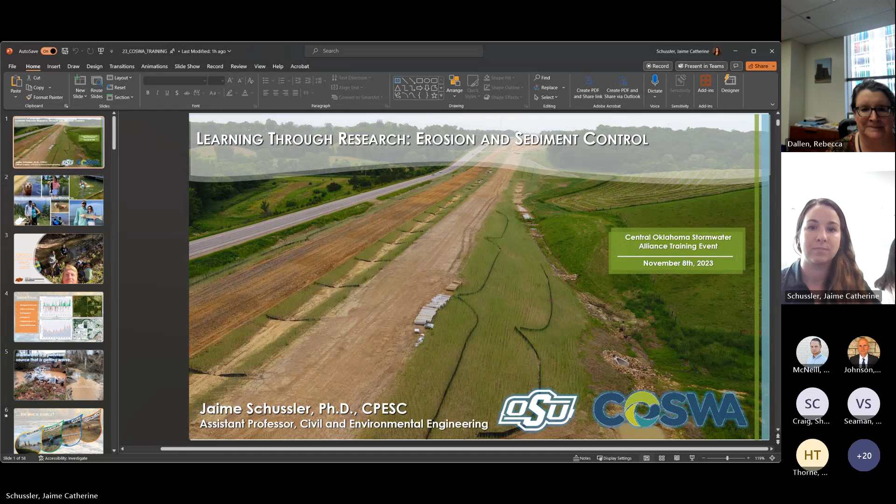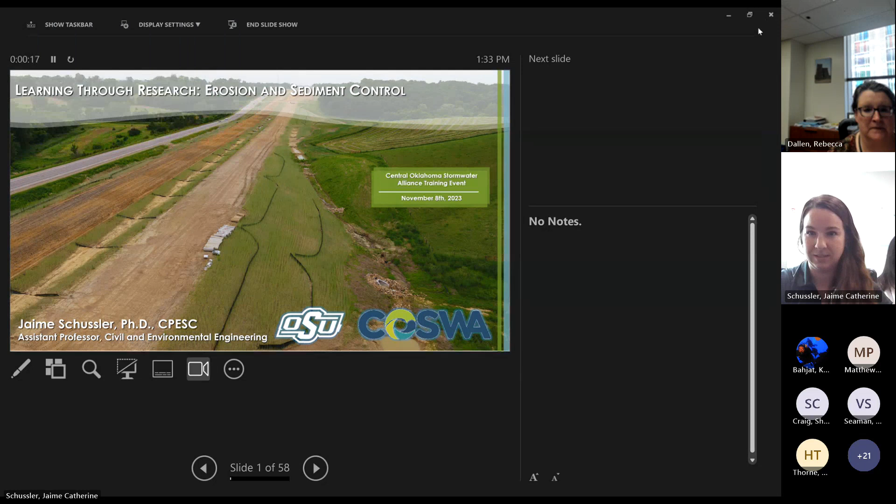Rebecca, are you able to see our screen? Yes, it just seems small and I'm not sure why, but we can see it. Okay, give me just a second. I apologize. Of course. Is this better? It is much bigger, yes. We can see all the... ooh, it ran away. We're almost there. This is the problem when we're plugged into docking stations. Yeah, I understand. Okay, but now I'm afraid we're on presenter mode. Is that right? Yes. Are we good now? That's the ticket. Third time's the magic button, I apologize for that. You would think with virtual learning we've got it figured out, but I appreciate you sticking with me through that. And thank you so much for having us. We're really excited to be here.

And this is a really special opportunity for me to get to have Cheyenne co-present with me. So this is really exciting to be able to showcase one of my graduate students' very hard work too. So as Rebecca said, we are going to be talking about the research I've done in the erosion and sediment control space and some of the more implementable tools that have come out of this. And then Cheyenne's going to present a bit about her research that introduces a new idea within erosion and sediment control that has to do with sustainable design.

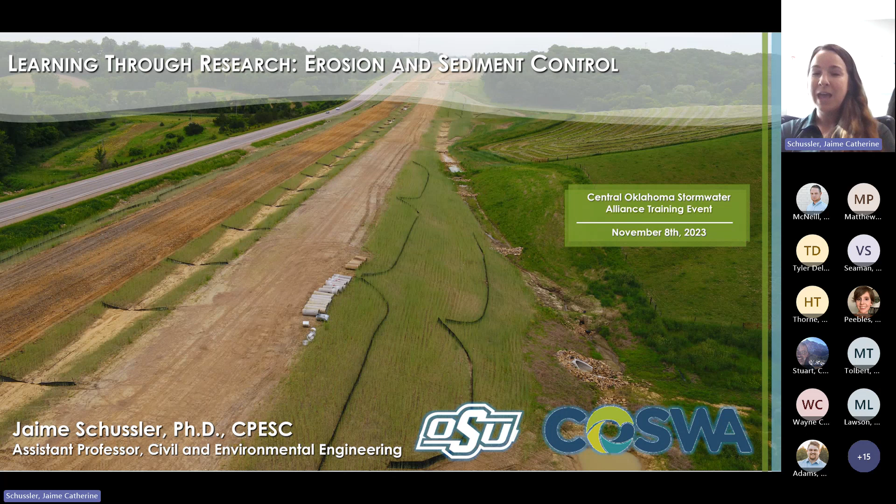So I always like to start out, if you've seen me present, by sharing some pictures or my story around our water resources. That's because it's really important to me in my personal life as well. So it's really exciting that I get to do work in my professional life that also complements my interest here. I care about our water resources for a number of reasons. One, you see this golden retriever, his name is Max, and we cannot keep this guy out of the water. He is our one and only baby right now, and we just want to make sure whatever water he's getting into, because we can't keep him out, is nice and healthy.

Also, we love to fish. You can see these are some of my proudest catches. But also, I grew up in the Lower Guyandotte watershed in Milton, West Virginia, and we struggled a lot with water quality and water insecurity. This has really inspired me to pursue my education, and now also research and mentoring in the stormwater space. Since 2022, I've been with the School of Civil and Environmental Engineering at OSU.

And I appreciate the Go Pokes because we were contemplating what picture to put here. We did think about putting that goalpost in Theta Pond, but we figured everybody has seen that. So instead, these are the lovely faces that make the Stormwater Research Group work here.

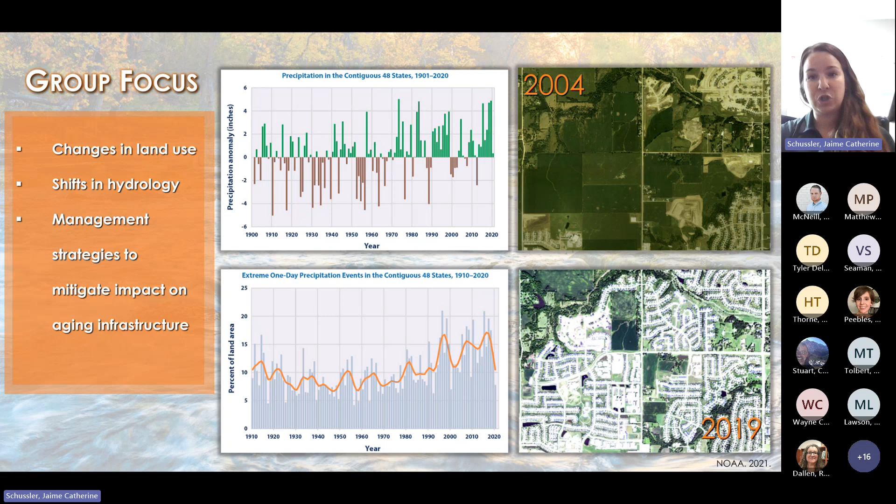Our group focuses on a number of different things, but primarily looking at changes in land use. So we look at stormwater post-construction, once we've got our neighborhoods built out, but also during construction. And that's where we're going to focus today, on that erosion and sediment control piece. This is all really important because we're having a lot of shifts in hydrology, with a lot more rainfall happening very intensely. So we really try to find management strategies to help mitigate the impacts of this changing hydrology on our landscapes. Stormwater is the name of our game.

Maybe that's because of the way we're implementing erosion and sediment control. Maybe they're just not adequate enough. But whatever it is, we've got to find solutions to get better at it. And so that's what we really focus on.

So I keep talking about stormwater, but it's not just construction sites. We know that stormwater from industrial, agricultural, and urban sites are very difficult and present their own unique challenges. But today we're really going to be focusing on that construction piece because that's where we're seeing those really highly turbid flows come from. So that's where we're going to be today.

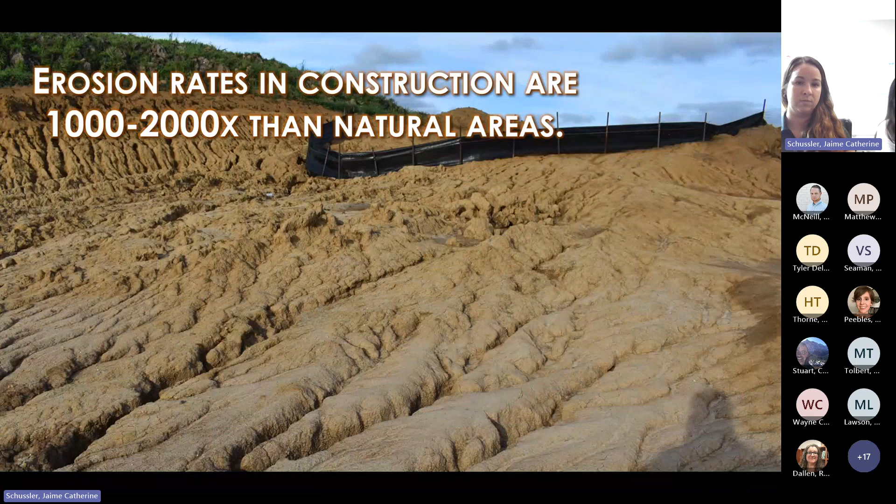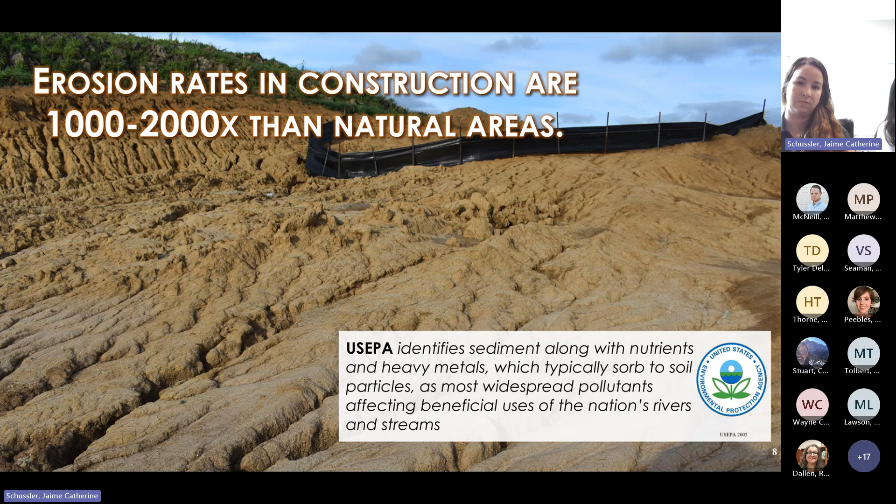And so Cheyenne, can you tell us a little bit about what we know in construction stormwater? Yeah, hi. So erosion rates in construction are anywhere from 1,000 to 2,000 times higher than natural areas. And the US EPA identifies sediment, along with nutrients and heavy metals which typically sorb to soil, as the most widespread pollutants affecting the beneficial use of our nation's rivers and streams.

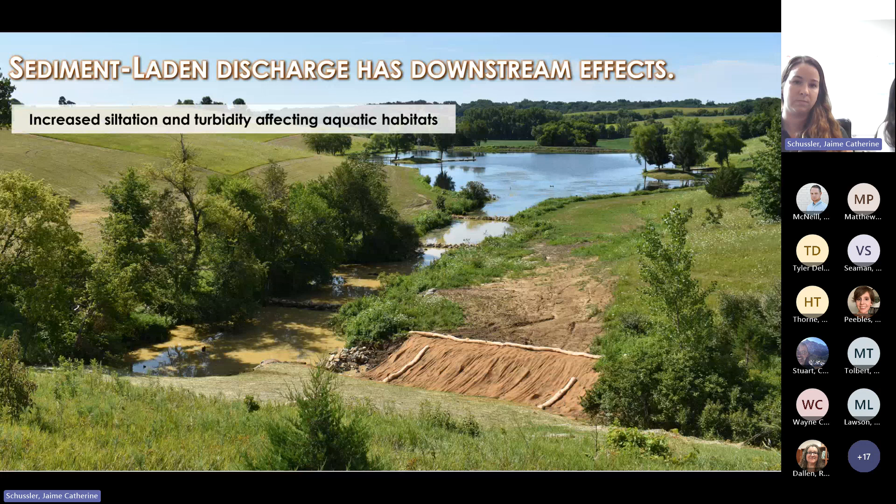So sediment-laden discharge has some downstream effects, and some of them are increased siltation and turbidity, which can affect our aquatic habitats. It can also reduce conveyance capacities, leading to flooding. It has a poor public perception, and it also can increase the water treatment that's needed later on, and we also get a loss of nutrient-rich soil.

The annual cost of soil erosion in the U.S. is estimated to be $45 billion.

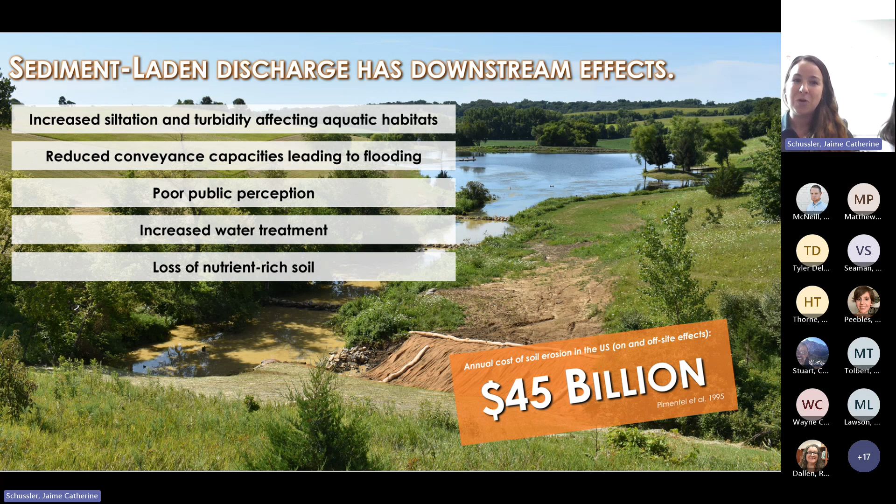So just to provide a little background of the picture that we're showing, this was a private farm owner's pond just downstream of a large construction site that I was working on. This is to provide some context that what we're doing on our site has real implications to people very nearby. And it could be any number of these effects, but especially with that poor public perception - if this was your pond and you were going to have to figure out a dredging plan for it after the construction finished, you would probably be wishing the people upstream were doing a bit better.

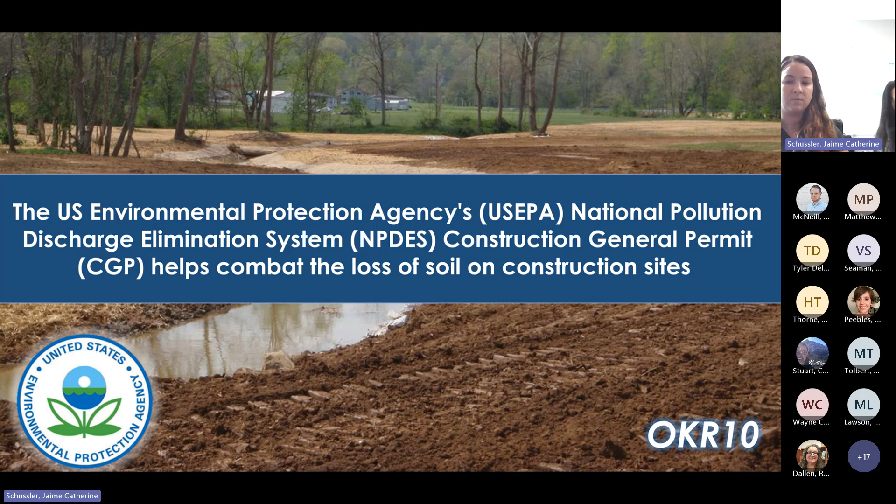So what are we doing about it? The US EPA has their National Pollution Discharge Elimination System, and within that is our construction general permit, which helps combat the loss of soil on construction sites. In Oklahoma, that's our OKR10 permit. Some of the requirements of the construction general permit are you have to submit a notice of intent if you plan to disturb more than 1 acre, and you also have to have a stormwater pollution prevention plan.

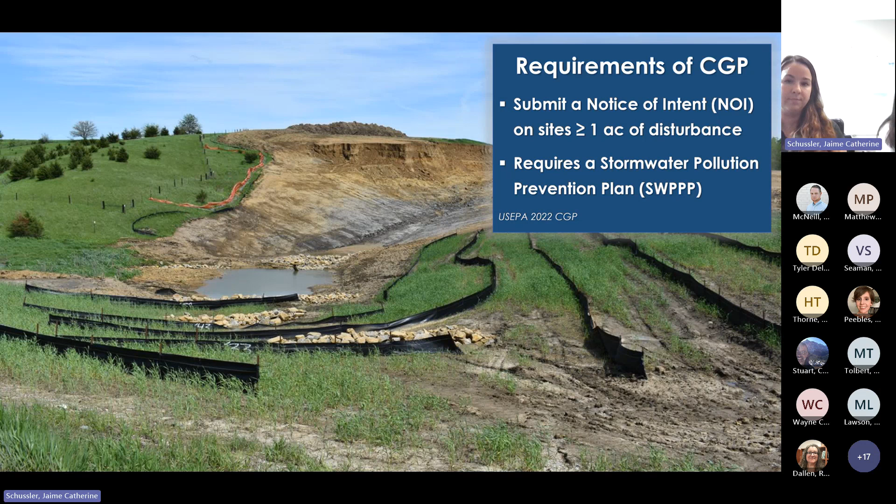So a stormwater pollution prevention plan is a living document that includes the design, installation, and maintenance of erosion and sediment controls. So what are erosion and sediment controls? Well, erosion controls work by absorbing or diverting energy, slowing the velocity, reducing dust, binding soils, or increasing the ability to absorb and infiltrate water. And then we have sediment controls, which work by intercepting flow, creating an impoundment, or providing volume and time for that sediment to settle out.

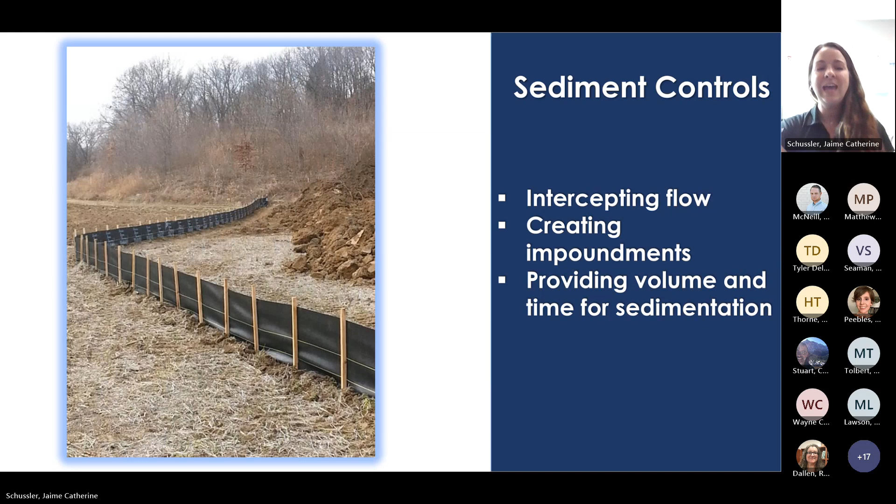And that's great that we have some of these practices in place, and some of them go from state to state.

But there's a lot of design guidance that's quite variable. And so that's one of the things that we try to address with performance-based or scientific-based research, to really say, instead of just, oh, this is a best management practice, trying to put some ground truthing into that with data. We often put in these practices out of rules of thumb, but we lack that true knowledge of how practices perform, and even more so how they perform during actual construction.

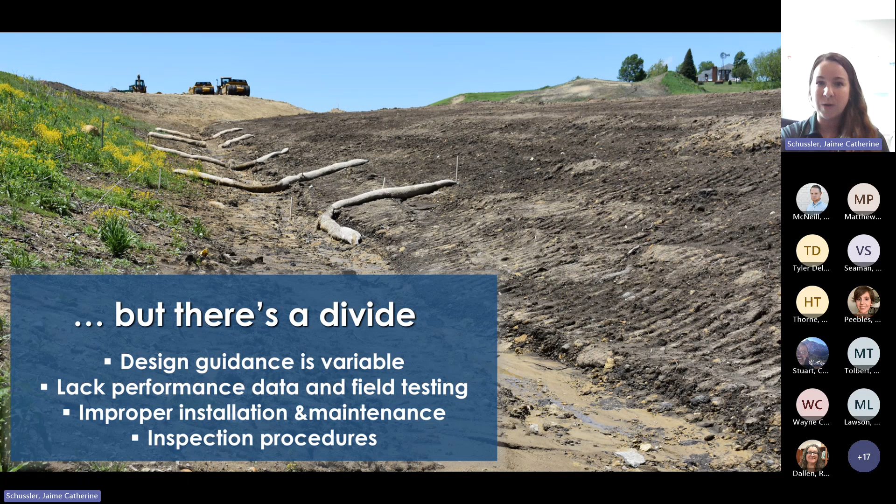The other thing we see is more on improper installation or maintenance. Maybe this is from lacking resources or just lack of knowledge. And so that's one of the things that I'm very passionate about, is that we're trying to spread the good word of what erosion and sediment control is and how these practices should be performing. The other thing is, Jaime mentioned it, a SWPPP is a living document. And so we need to be inspecting and updating our SWPPP. And sometimes we just don't have the power on site to be able to do that, the man or woman power that is. And so there's a huge divide when it comes to the design of these practices.

So we're going to focus largely in the ditch check space or check dam space today. Some that we'll talk about are riprap, silt fence, and wattles, or some people call these socks. And so this is really what we're going to focus in on for the majority of our presentation, with some small deviations. Now, in this last image, we see a lot of newly installed ditch checks or check dams, and they're doing great, or we expect them to do great once that rainfall comes.

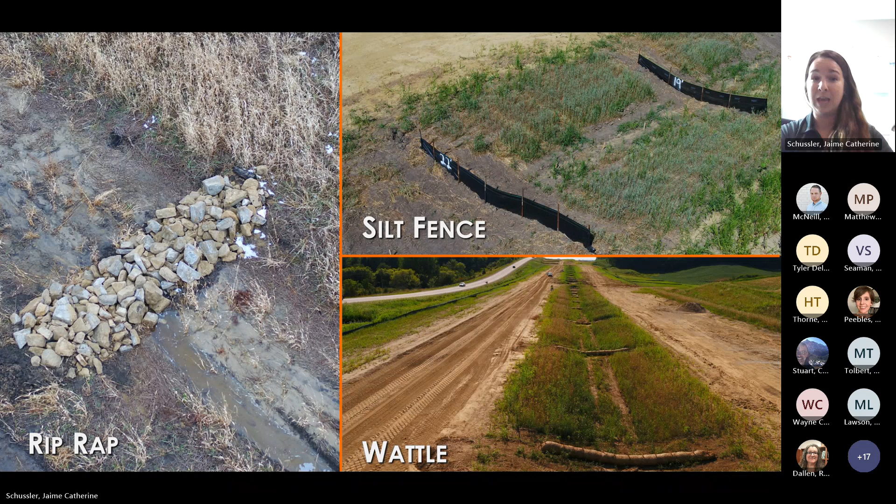Jamie, I don't know if you can hear me, but we have lost your audio. I wanted to look into that. Oh, goodness. Did you have an issue? Your audio for a sec. How long has it been? It was probably about 15 seconds. We were looking at that last ditch check picture. Okay, that's all right. And we don't know how long they've been in that state, I think is kind of where you were at. Right, exactly.

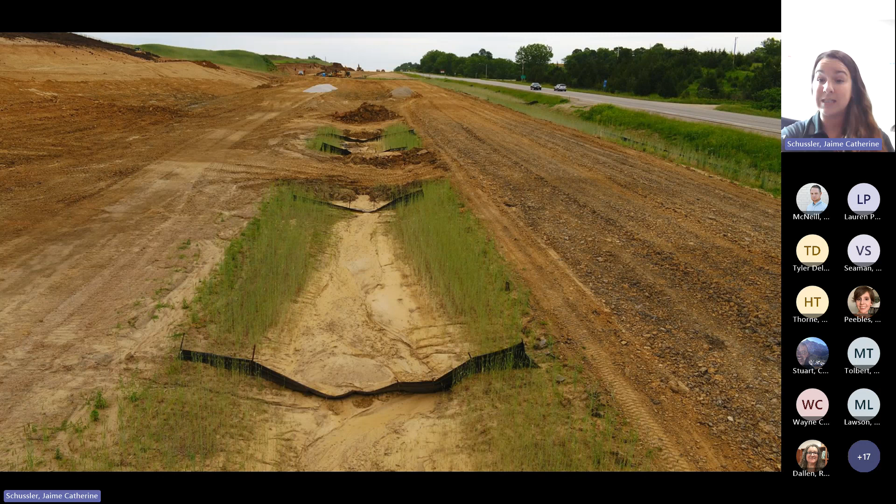Thank you, Rebecca. So of course, we're not sure what caused this, if it's the sediment load, if it's hydrostatic pressure from channelized flows. And so we really wanted to identify what we could do to improve this. So we installed a number of ditch checks in various installations. We did weekly inspections and monitored the rain. And then we also did ground surveys to track the channel erosion and sediment deposition. And this is part of our effort in putting numbers behind the performance of some of these practices.

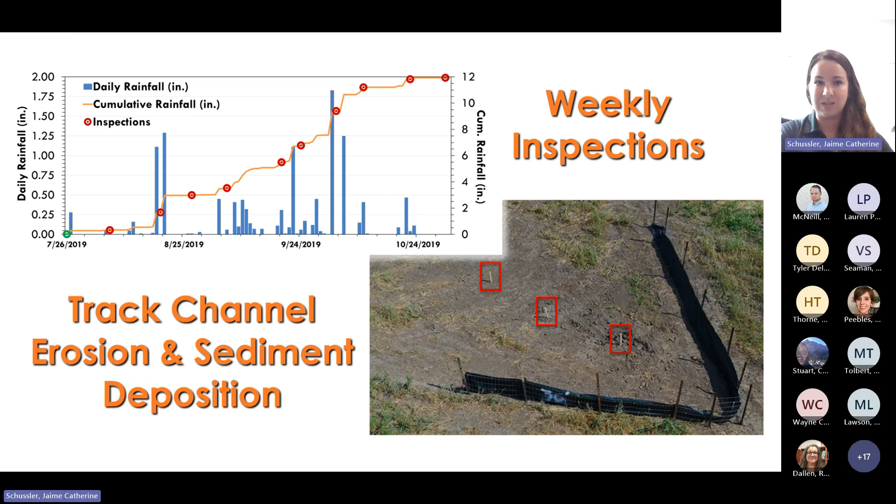So this is our standard silt fence ditch check. I was working on an Iowa DOT site. So this was just a silt fence installed perpendicular to the direction of flow, and just staked, I believe they were 4-foot spacing on this. And so over time, this was after 12 inches of rainfall, we see some sedimentation that's happened upstream in this channel. And then downstream, maybe not so much. We also see this T-post that's deflected and maybe some evidence of undercutting here. And so when we looked at 3 different instances of the same installation, we found on average we were capturing a half of a cubic foot of sediment on one of these silt fence ditch checks. And so we looked to other places.

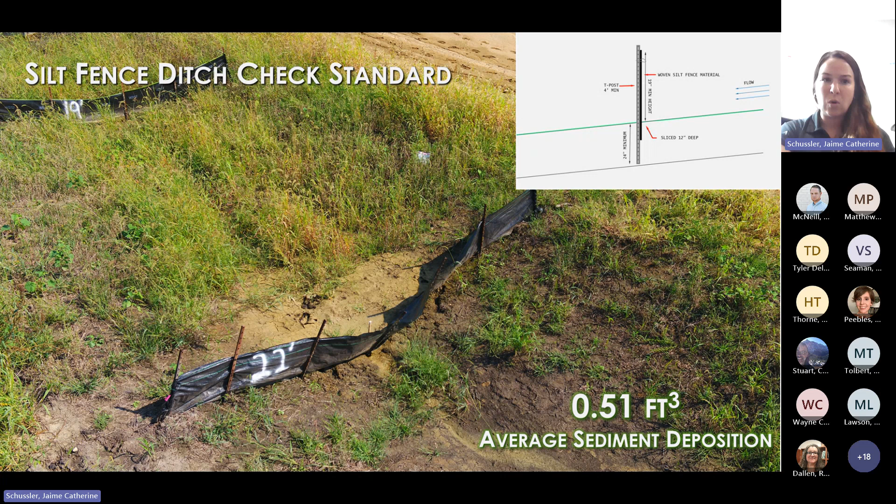As I mentioned earlier, the designs really are variable. And so this was a silt fence ditch check that we saw being used in the southeastern portion of the US. And this was a V-shape silt fence ditch check. It was cut slightly lower at the vertex, and this was to create a weir or a known dewatering point that we could control. And that way we were hoping if we can control the hydrostatic pressure, then maybe we're not going to have that T-post deflection. The same thing you'll see here, we have like a chicken wire or a wire mesh reinforcement. And just visually, we can see that the sediment impoundment goes much further back in the channel. And when we put numbers to that, we found that we increased the sediment captured on one of these ditch checks by about 4 times.

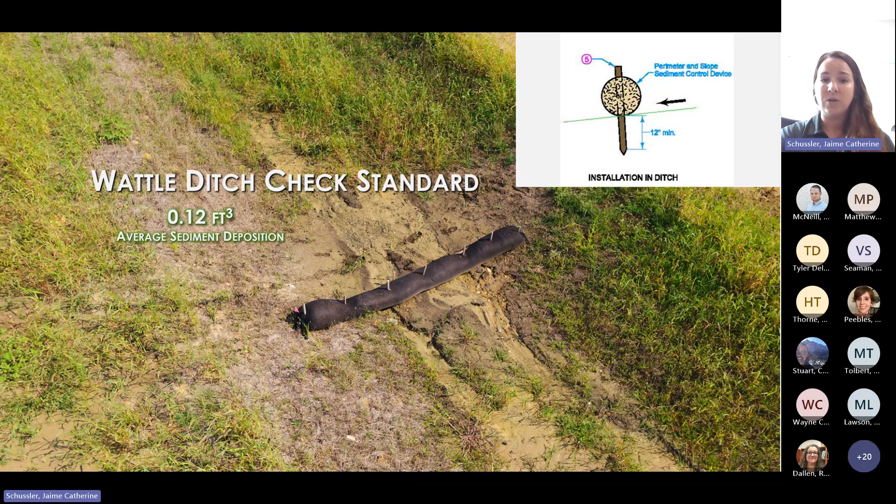So this is just evidence that our designs are really variable. We call them all best management practices, but really some are performing better than others. So same idea here with a wattle ditch check. This is a wattle, inside are wood chips, and then we have that sock encasement that's laid down in the channel and just staked directly through. Again, after the same period of time, we looked, and on this installation, we were capturing about 0.1 cubic feet of sediment. And so, again, look to other standards, maybe something a little bit beefier.

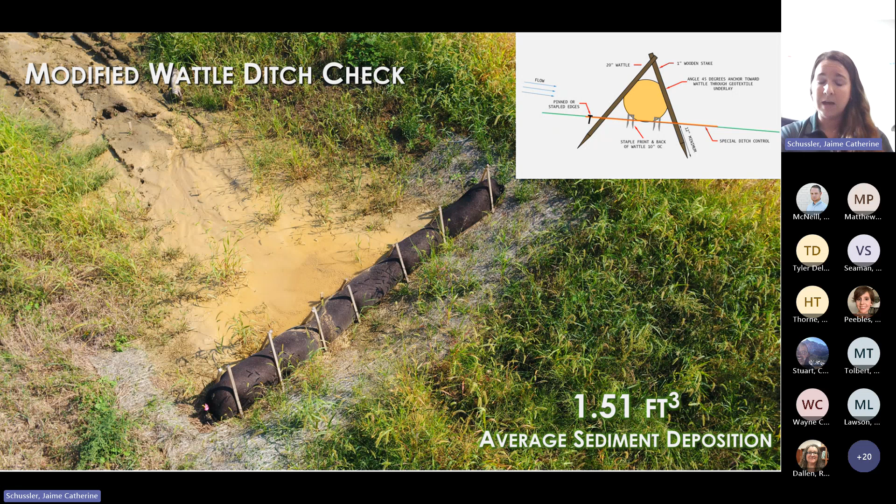We changed that wattle installation to use this non-destructive or A-frame type staking. We have a natural fiber that's an Excelsior mat laid down in the channel, and we use some sod staples to really create that contact between the wattle and the ground. And what we saw is that we increased sediment deposition captured on that wattle by 12 times. So there's something to this.

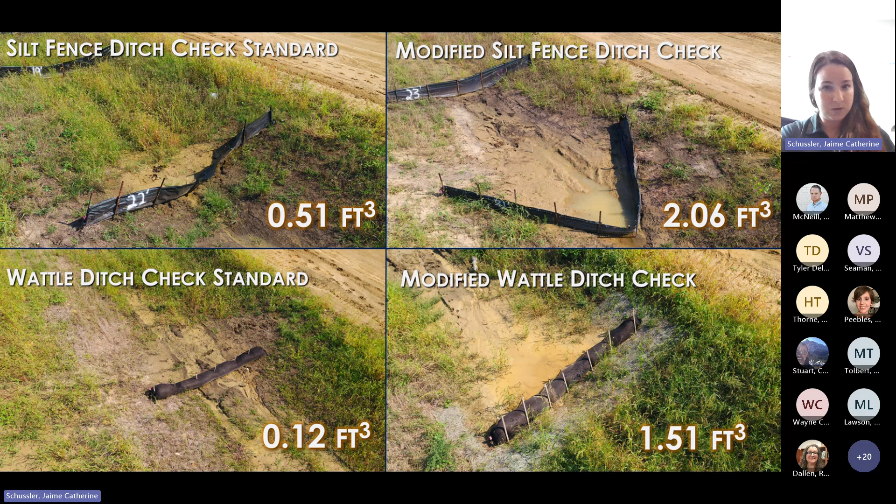So again, just to give us an overview of where we're at from these standards, we looked outside to what other places were doing, put these installations in during actual construction and monitored, and we were able to improve performance. Now, for us, this resulted in a design modification for the Iowa DOT. So especially in that wattle, that's what's being shown here, we changed from that standard and went to that non-destructive staking and implemented that sod pin. So this was now adopted into their specifications of how wattles should be installed in a ditch. So that's a pretty tangible change from performance-backed research.

And so on the site we were working on, there was actually 3,500 ditch checks that were going to be implemented over the site, and that's all ditch check types. But we went ahead and extrapolated this data of what it would be if all the ditch checks were changed to these modified standards. And so with the standard silt fence design, we would have captured about 4.5 truckloads of sediment on these practices. If we did the modified design, we would have captured 18 truckloads. So with this knowledge, if you are not improving or putting in performance-backed erosion and sediment control practices, you're essentially dumping 13.5 truckloads of sediment from your site into the receiving waterway. And so this makes this all a bit more tangible if we can visualize.

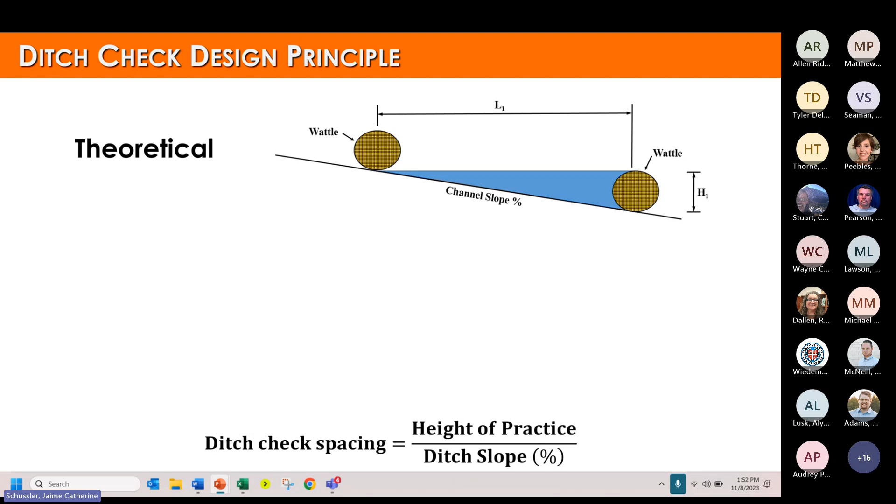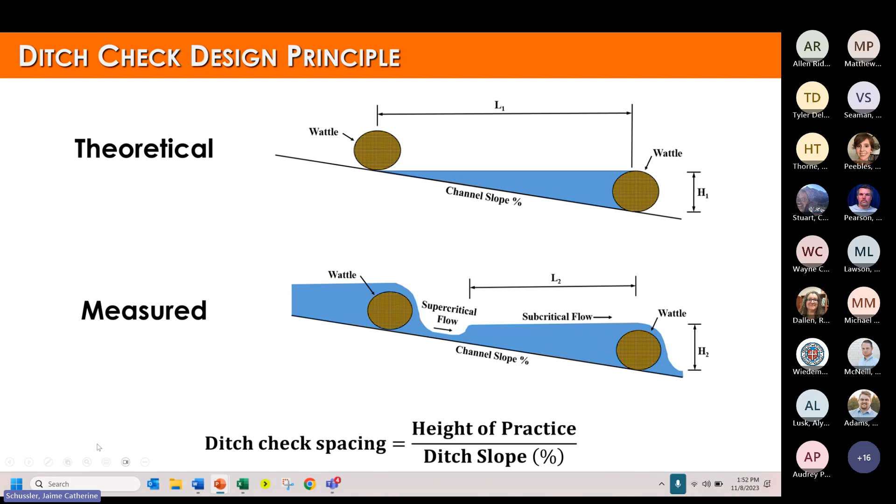Now, oftentimes we get improper spacing, and so we'll get these areas of subcritical and supercritical flow. If you're not familiar with those terms, that's okay. Subcritical flow is what we want in erosion and sediment control. These are slow moving, deeper, what I call gushier flows, whereas supercritical are going to be these shallow, fast-moving flows that can be very, very erosive. And so we want to make sure that when we're designing with ditch checks that we're using the proper spacing.

And so we looked at a number of different wattle practices because with wattles, we see there's a variety of fills and encasement materials, and they allow water to pass through at different rates. So we looked at several that were very widely used and available.

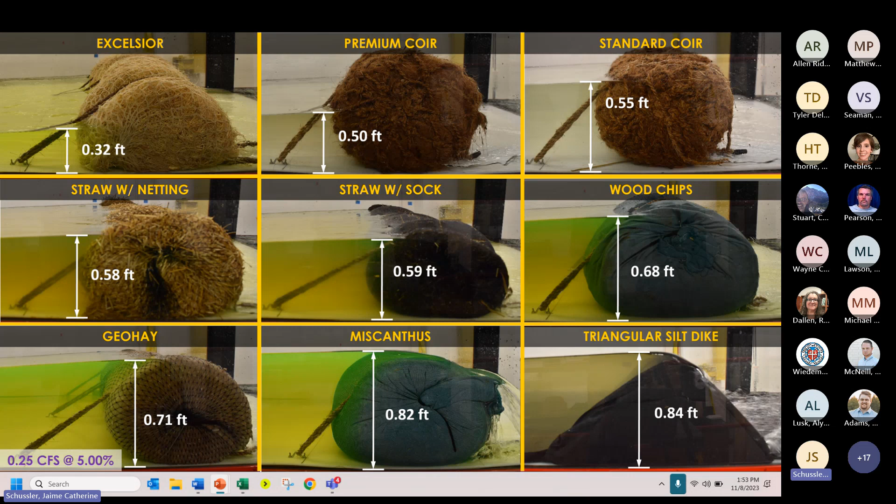Maybe you'll see some that you're familiar with, some with straw, some with Excelsior. We even have triangular silt dike here. And we measured the height of the impoundment, and that also correlated with how far back the impoundment was going to go so that we could figure out that spacing. And from that, we came up with this ratio of the length ratio, so how far back the impoundment was going to go. And that way, if wattles were allowing a different flow through rate, we could properly space them using this impoundment ratio.

And so we brought all of these things together in a tool called CheckSpread, which I'm going to show you today. And so this tool, we created out of the outcomes of our research. And so we allow users to toggle in between different ditch check types. They can input their channel geometry. And then this will let the user know how many ditch checks they're going to need, what that spacing should be.

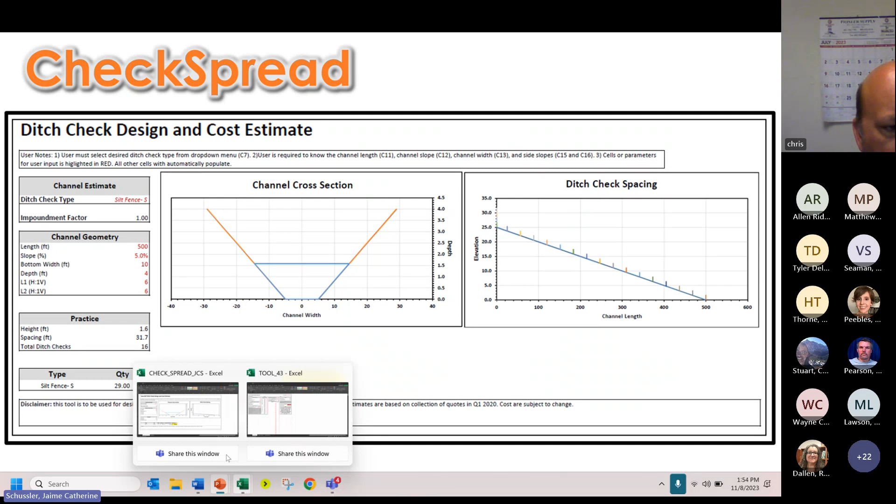And then I just want to be transparent here. It gives a cost estimate. We did this cost estimate based on the site we were working on in Iowa. So it might not be perfectly representative for Oklahoma, but we used the costs there that were available to us. And so I'm going to show you that tool, what that looks like. And all you would need to use this would be simple Excel. So if you have Excel, then you're able to open this tool.

Anything that is shown in red text would be user input, and then the black text is going to auto-populate here. So this is just the front user page. That's what you would need. And then this reference page, which is locked with various different calculations, and then also the cost component of it. So here,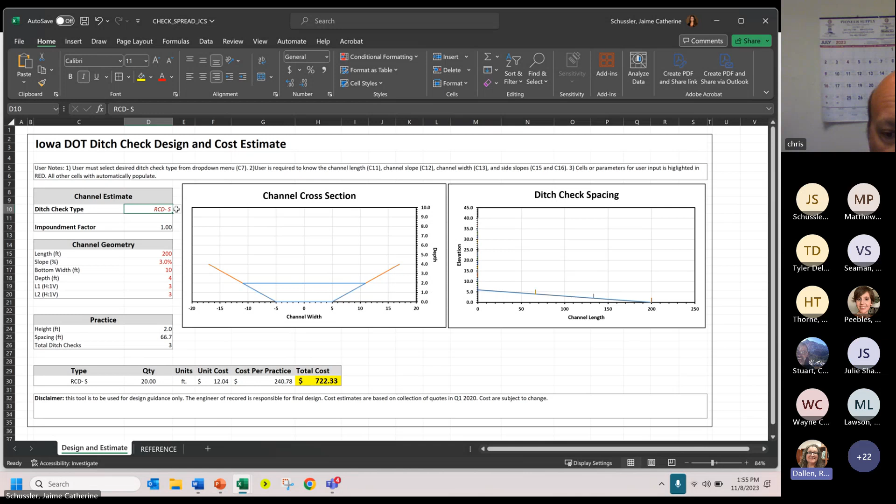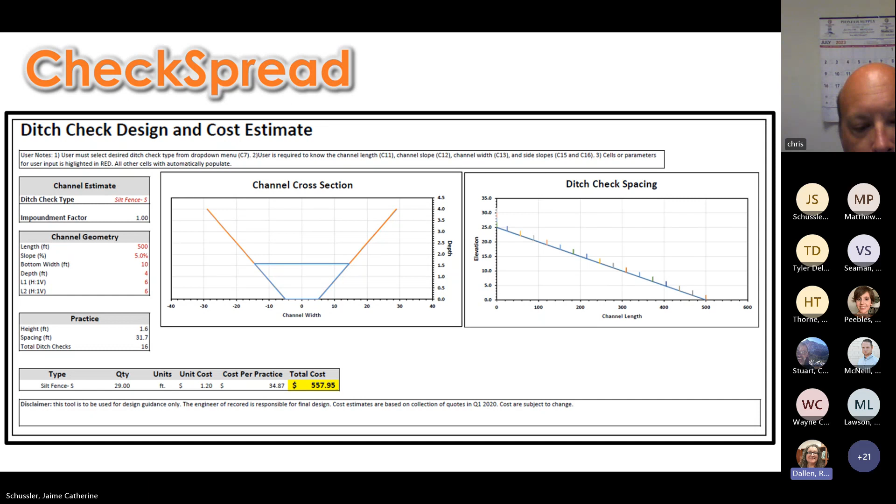Jamie, I don't know if you can hear me, but we lost your audio again. Challenging internet options, day. Can you hear me, Jamie? I can hear you. Yes. Okay, I am going to try to hardwire my computer to Wi-Fi and see if that will help us at all. It's just one of those days. There it is. I so apologize. I hate that. And so I think you're still probably seeing too small. I can hear you, if that helps. Yes. I won't curse my computer then if you can hear me. Probably safest. I'm just teasing. Okay, so are you able to see an Excel screen now? No, we're seeing a black screen. It's like it's trying to share, but it's not sharing anything. Doesn't want to share.

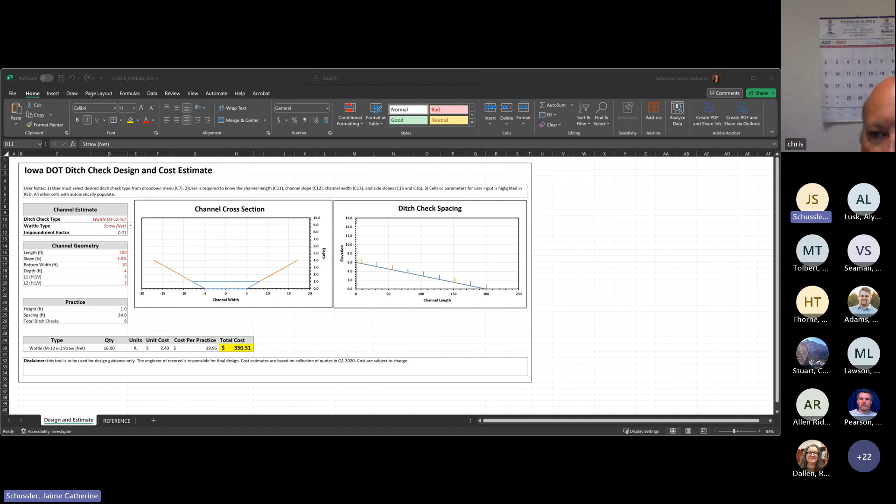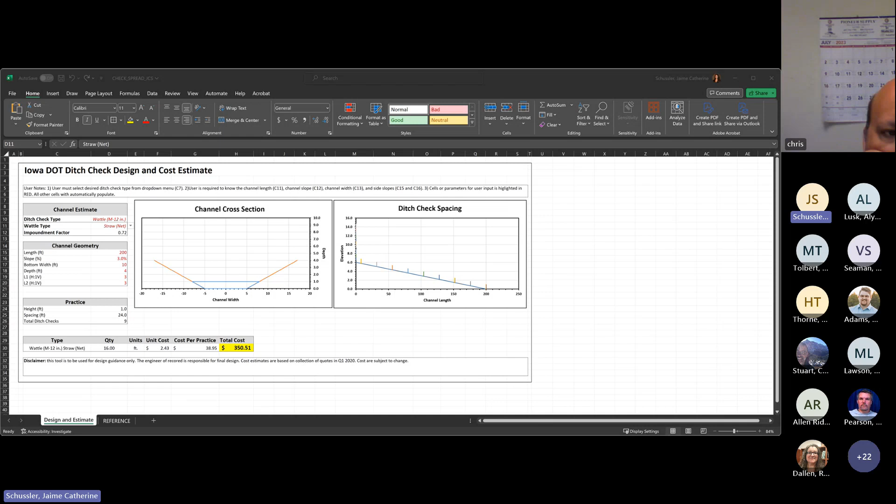So this is a really high-level overview of what this tool can do. But again, I'm happy to spend time and share these tools with anybody who could benefit from them.

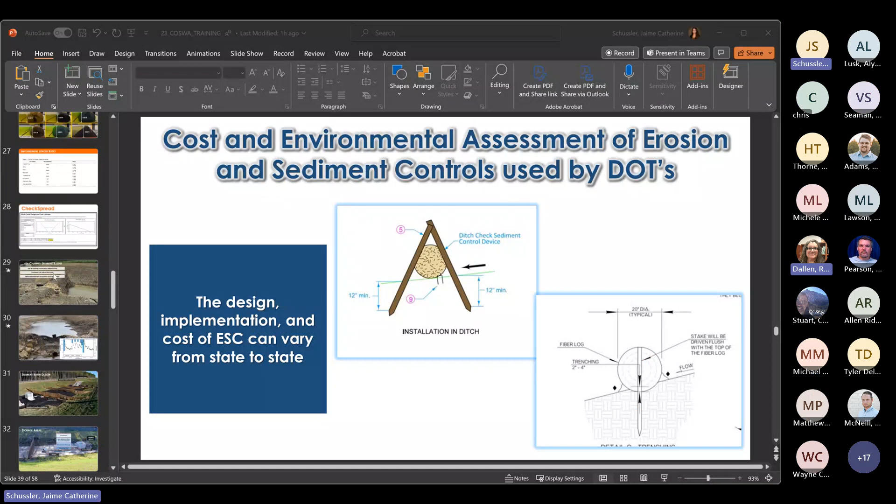We are still seeing your Excel. I thought you were going to transition back to your PowerPoint. I thought I was presenting as if I had done that. That's okay, I wasn't sure and I didn't want to interrupt. Nice, Rebecca. So, some of the things that I quickly went over. Not an easy technology day at Oklahoma State. Jokes we will accept.

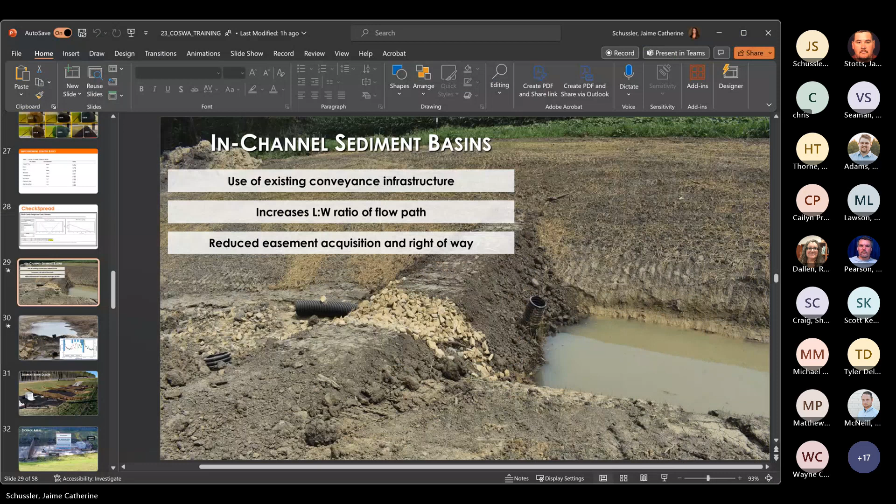These were just some of the quick slides. I showed that a lot of times our erosion and sediment control practices just aren't going to stick with us. Throughout the site, we really need to make sure we're inspecting, maintaining, and adjusting our design.

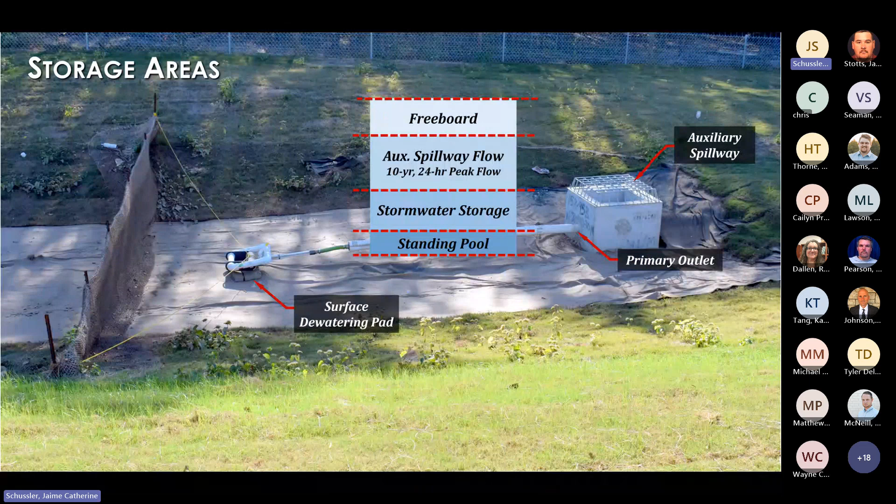So that's exactly what we did. These were those areas I was talking about with storage. Rebecca, I'll share all these slides with you, that way if anybody wants to spend a bit more time, they are more than welcome to.

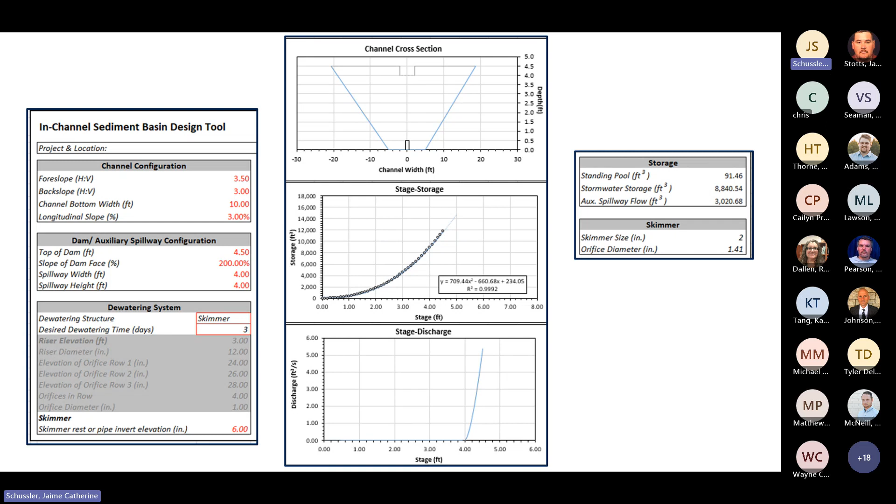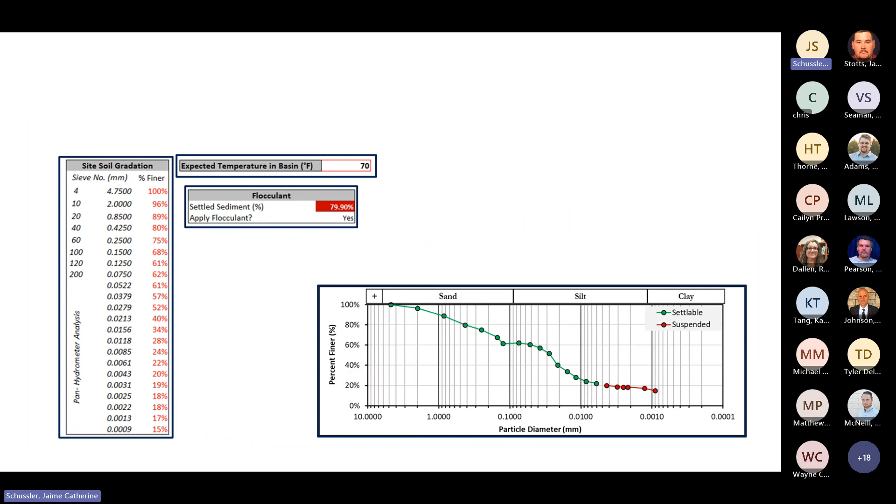And this was showing some of the outputs of our sediment basin tool as well. So a couple of things with channel cross sections, stage storage curves, that sort of thing. Again, more information here about your inflow and discharge hydrograph and what those volumes look like over time. And then finally, what that sediment gradation could do and what we would predict to settle based on that.

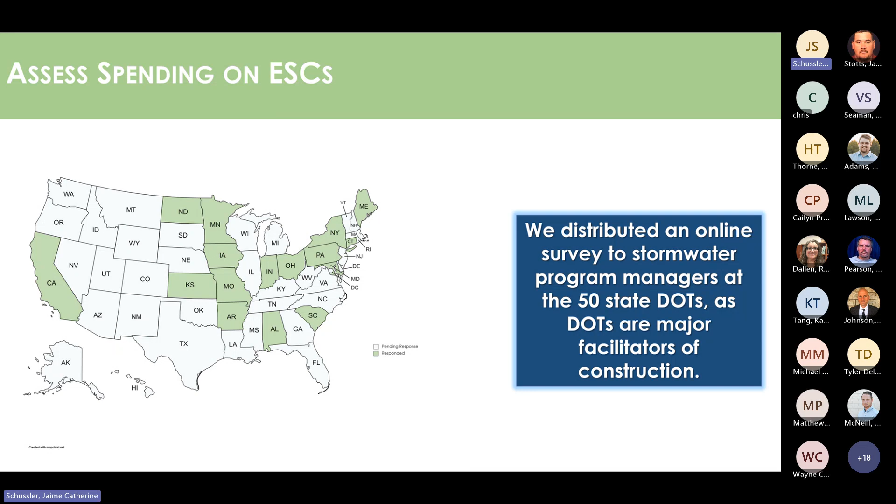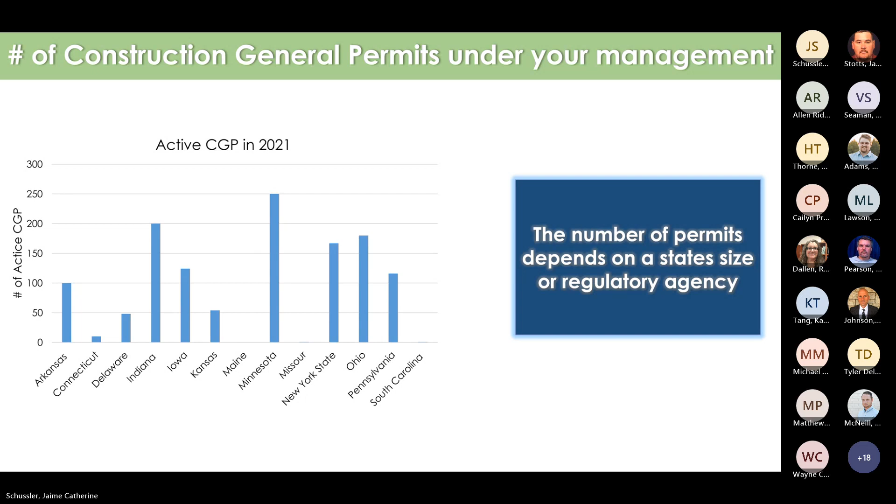And so the number of permits that a state has depends on the size of the state and the regulatory agency. So some states have as low as 1, whereas other states like Minnesota have 250 construction general permits under their leadership.

We also asked DOTs how many DOT-led and how many contractor-led inspections were conducted that year. Within the construction general permit, it states that inspections are to take place every 7 or 14 days, depending on that site's proximity to an impaired water body. Also, no matter what, inspections have to be conducted 24 hours after a storm event.

We see that these inspections range quite a bit. Pennsylvania had almost 10,000 inspections, whereas some states like Maine maybe only had 100. This also just kind of depends on how many projects they have under their management, which determines how many inspections they're going to conduct.

With these inspections, like we were saying, we want to continually inspect to see if something is failing, so we can take it out and replace it. These inspections can also influence the quantity of erosion sediment controls that are used, which is what I'll talk about a little bit later on.

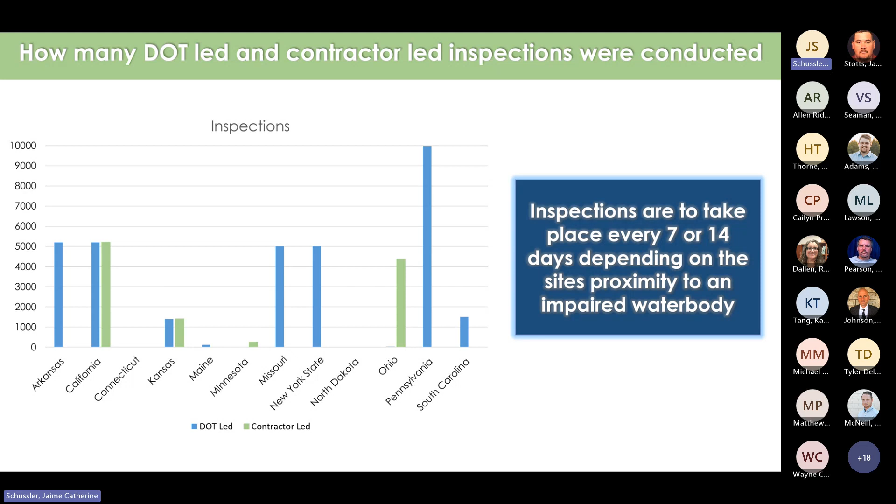We also asked DOTs to report the percentage of total project costs spent on stormwater management. We saw that an average of 2.35% of total project costs is spent on stormwater management, with the upper limit being about 15% and the lower being about 0.23%.

The next part of my research was to do a life cycle assessment. To do this, I looked at Oklahoma and Iowa DOT standards and specifications, and then I cataloged each of the practices, breaking them down into individual materials. Then I set sample boundaries.

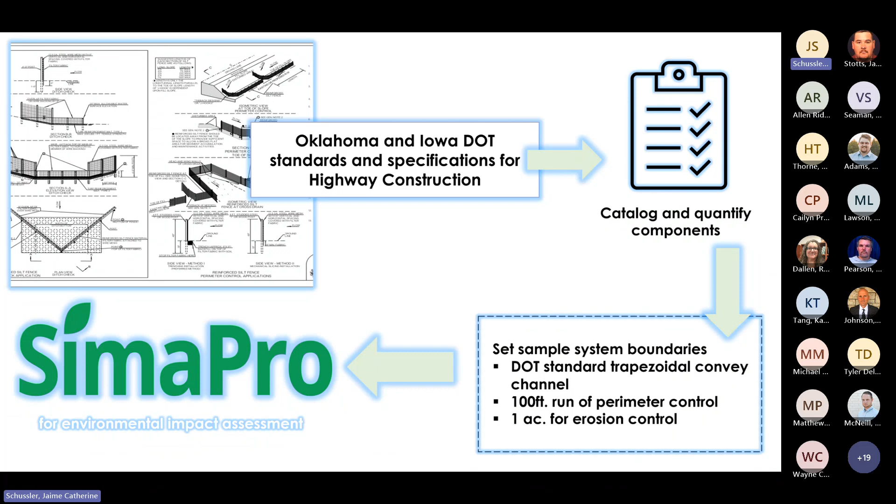When looking at the materials used in these practices, I only looked at the material extraction and manufacturing phase of a material's full life, since this was more of a nationwide survey. What happens after manufacturing—distribution, usage, and end of life management—depends on the state, the contractor, and things like that, so I wasn't able to look at those phases.

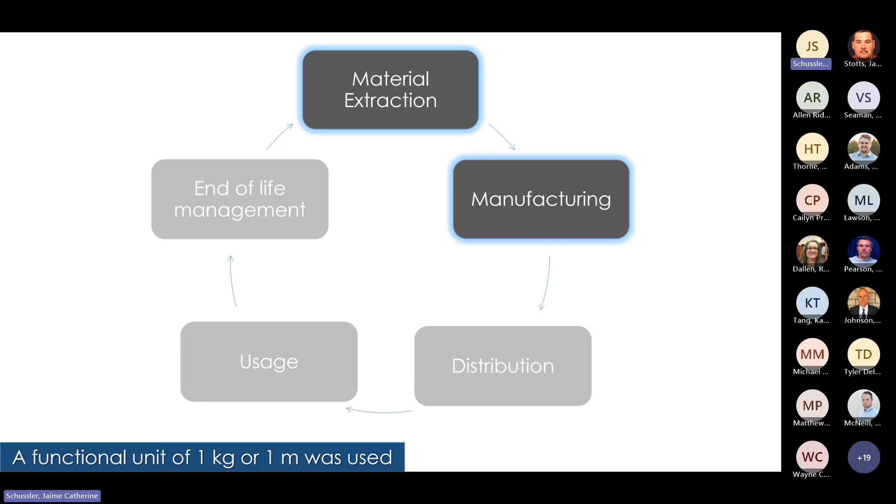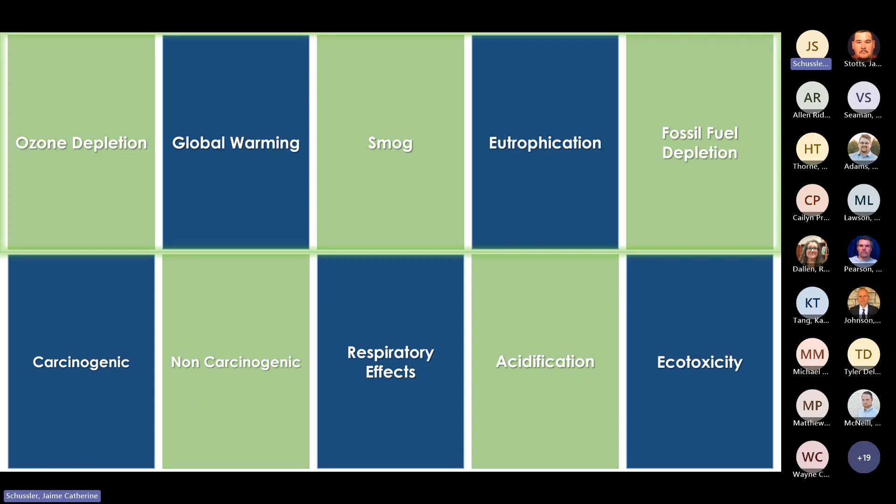Within SimaPro, each output I got was either 1 kilogram or 1 meter. We had 10 impact categories we could look at within SimaPro. The top 5—ozone depletion, global warming, smog, eutrophication, and fossil fuel depletion—were the main ones we were concerned with. We looked at all 10, but these were the 5 we focused on.

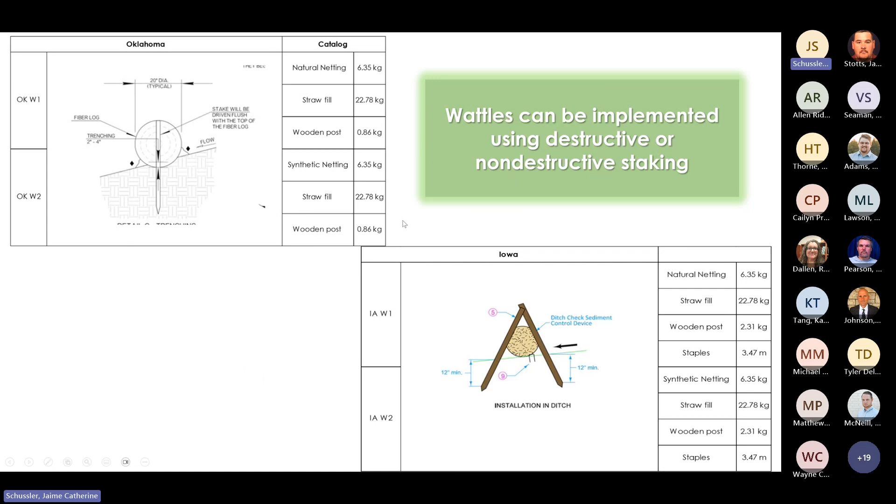And then I also looked at wattles for each of these states. So, like talked about earlier, wattles can be either done using destructive or non-destructive staking. And then I just did the same thing, I cataloged all the materials and found the weights of them. And then SimaPro gave us the outputs that you're going to see on the right.

And so to compare these, we normalized the data. To normalize the data, we identified the highest emissions out of all of them. So you'll see right here, silt fence for Oklahoma has the highest emissions when compared to Iowa silt fence. So we took that lowest value and put it over our highest value and multiplied it to get a percentage. And then we put it into a graph, and this is what we got.

So this is for our in-channel practices. What we're seeing is that our Iowa wattle 1, which had jute netting and a straw fill, is going to have our highest emissions in ozone depletion and in eutrophication. And then we see that our Iowa silt fence 1, which has a steel T-post, is going to have our highest emissions in global warming, and then in smog, as well as in our fossil fuel depletion.

And so wattles with jute, that isn't a natural material to the US, so it has to be brought over, and that's going to cause quite a bit of emissions. And then for our Iowa silt fence, the spacing between those posts is shorter than when you're looking at Oklahoma, so you're using more steel in that way. So that's why we're seeing higher emissions in that area.

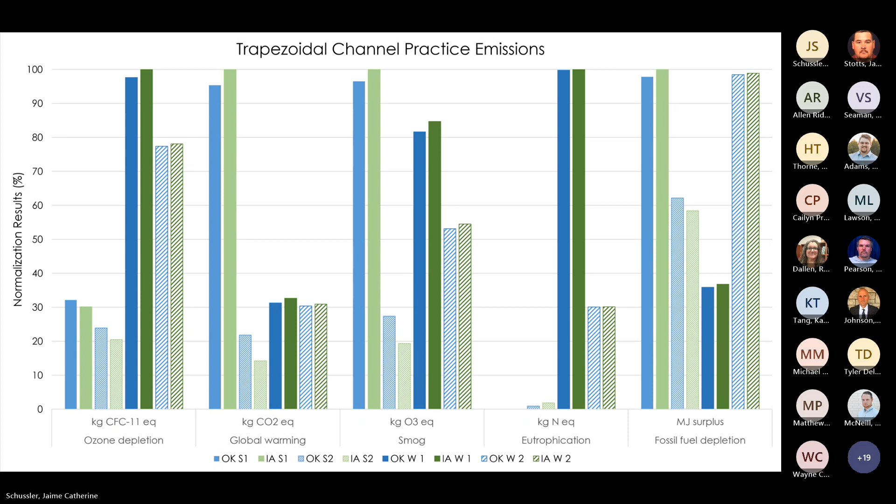Can't move. Oh, yeah. You just switch this. Oh, did I move?

Oh, sorry. And then when we looked at trapezoidal channels, we broke them down into silt fence and into wattles, so that we can look at them separately as well.

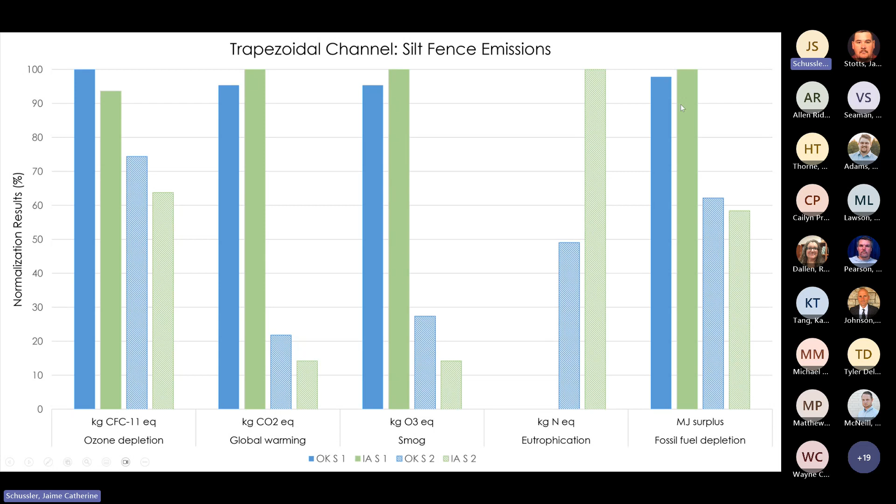And here we see that Oklahoma silt fence has the highest emissions in ozone depletion, and then Iowa's silt fence has the highest emissions in our global warming and other categories. And then we did the same thing for wattles, and we saw that Iowa's wattle had the highest emissions in ozone depletion, global warming, smog, and eutrophication, and then their second wattle had the highest in fossil fuel depletion.

So our findings showed that natural products did not have a lower emission in the manufacturing stage. However, this study does not suggest the removal or exclusion of components, as this can compromise the performance of practices. So while we're reporting these findings, it's not to say that just because something has higher emissions doesn't mean that it's going to perform better or worse than other practices.

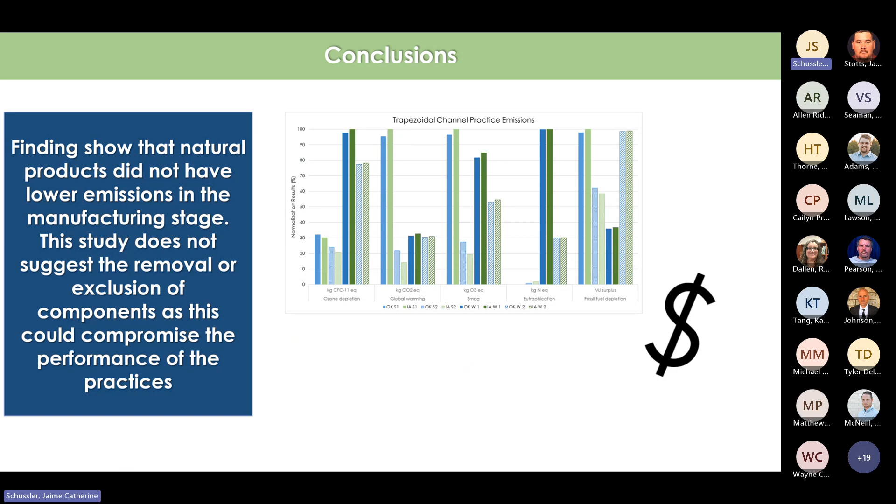Thanks. And so with Jaime's research, it's not to say that we need to maximize our T-post spacing, because then we might have problems with performance. But we see a lot of the shift from synthetic materials into natural materials for reasons that she mentioned previously, because a lot of times these are getting left behind in the field, and we're seeing some wildlife entanglement.

So there's been a big push to go to these more natural materials. But there's also now a desire, especially to try to reduce greenhouse gas emissions, to do some of these environmental product declarations to say exactly what goes into making these products. And so Jaime's research is really early into this field of trying to figure out exactly what happens when we do material extraction and manufacturing of these products.

What is the environmental impact just of that use phase? So again, not really suggesting anything based on design right now, because we might need more T-posts to make sure that our practices are structurally sound, or maybe that wattle is the most appropriate in that application, but just knowing and being conscientious of what goes into the manufacturing of these materials.

So together, we're hoping that we have inspired you to think about current design practices, challenge the norm of best management, and really work to find that, especially in our current and projected hydrology. Also, in engaging in this knowledge exchange - if we just stayed siloed into what we were doing only here in Oklahoma, instead of pushing ourselves to think more globally and doing that knowledge exchange, we would have never come up with some of these design alternatives. So really just talking with your neighbor and figuring out what's working for them, and it might work for you too.

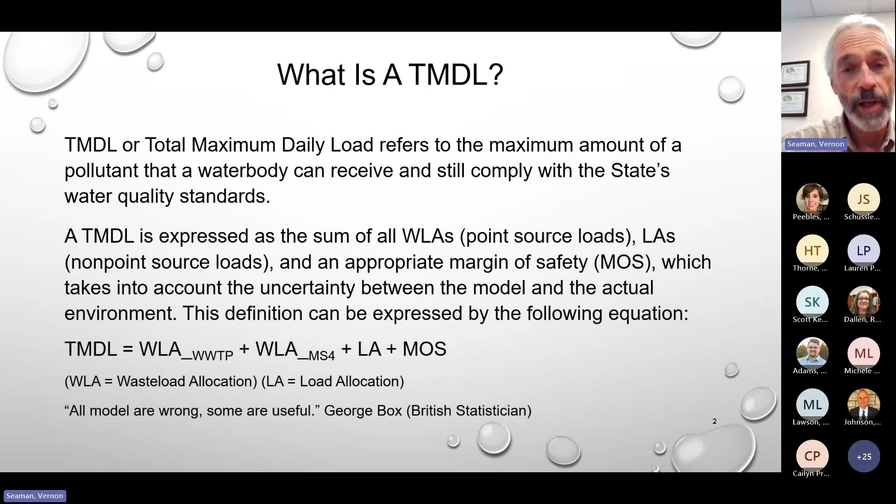George Box was kind of the guru years ago on modeling, and there's so much truth to that. The more information you have, the more accurate your model is going to be. That's the whole point of gathering data, and we'll be talking more about that as we get into this. But that's basically what a TMDL is - it's the state's calculation of what load a receiving water can receive and still meet state water quality standards.

Okay, so how is a TMDL created? It starts with the water quality monitoring aspect. You've got to gather the data - you have to have data to put into the model. That can be from state agencies, federal agencies, local agencies, wherever we can get the data that is suitable for the modeling project at hand.

And then you assess the data. The state agencies will assess the data they have and determine whether that water body is meeting the water quality criteria standards. If it does not meet the standards, it'll be placed on the 303(d) list of impaired water bodies.

So if that water body is on the 303(d) list, then there are so many of them - obviously the state cannot get around to writing TMDLs or preparing TMDLs for everything that's impaired. So they have a priority project, program, or rating system that they use to assess a priority to each water body, which ones are going to get prioritization for TMDL establishment. So they'll go through that, rate them all.

Once an impaired water body is determined to need a TMDL and it comes up in its list, the TMDL development will occur. That's a fairly long process - it can take quite a while. Oklahoma does some of its own TMDLs; they contract some of that work out. But in the end, they're going to end up with a TMDL.

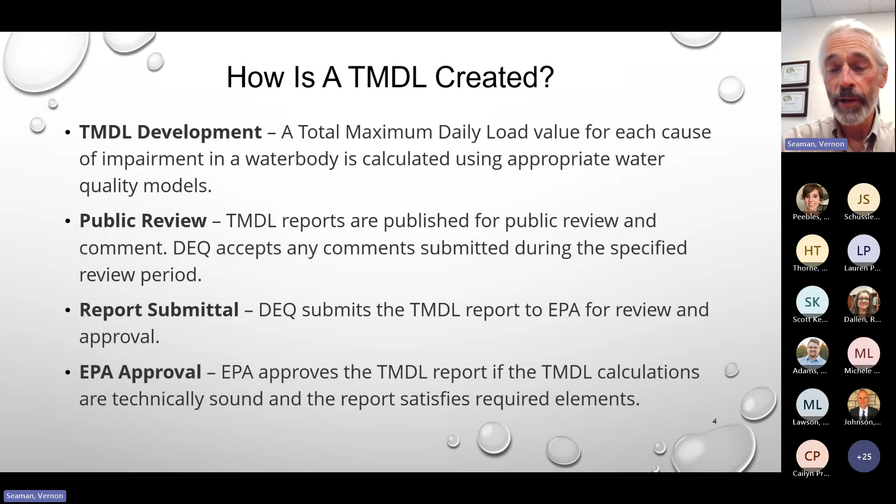Now let's get into the permit itself. We're just going to confine our discussion to what is in the permit. There's a lot of additional information you can find all over the place on TMDLs, how to implement a TMDL, which BMPs or best management practices are most effective. But let's stick with the permit - what does a permit say that a permittee, an OKR04 permittee, must do to comply with the requirements?

So the most recent permit, OKR04 MS4 Phase 2 permit, came out June 1, 2021, and TMDL is mentioned 77 times in that permit. So it does pop up over and over again. It's an important aspect of that permit. For many of you, most of you, this will be your first dive into TMDL compliance requirements. So just getting started on that.

And so what I'm going to do is just pull out passages in the permit, and then we're going to discuss those passages and what they mean. So part 2 of the permit, coverage under this permit. 2C says limitations on coverage. Point 6, discharges not consistent with the TMDL are unauthorized.

Discharge of a pollutant in any water for which a TMDL or watershed plan in lieu of a TMDL, and you can write watershed plans in lieu of TMDLs, for that pollutant has been either established or approved by DEQ or U.S. Environmental Protection Agency, EPA, is prohibited.

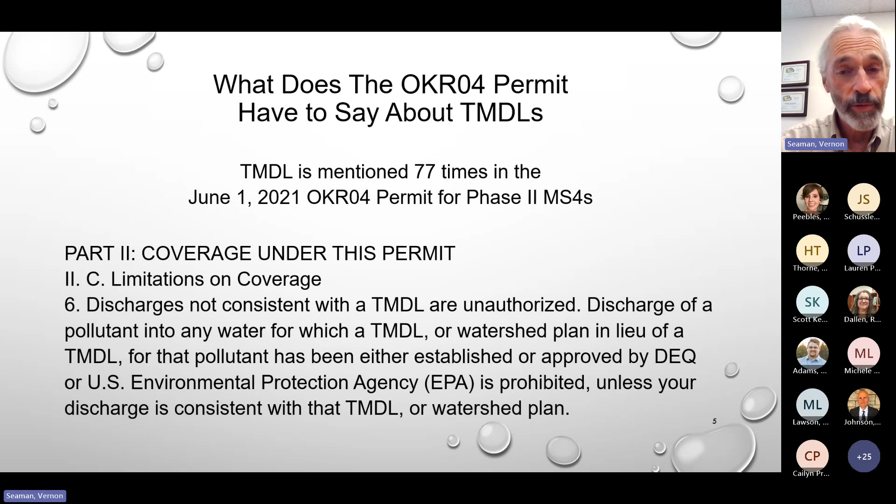So unless your discharge is consistent with that TMDL or watershed plan, basically what that means is if you have a TMDL and you have discharges to that TMDL water, then anything that does not comply with the TMDL is considered an unpermitted or prohibited discharge. So that's why it's important to understand what's in the TMDL and what your obligation is. If you don't comply with the TMDL requirements, then the DEQ considers that an unpermitted discharge.

Section 4B1 says SWMP review and modification. Your MS4 shall evaluate the existing SWMP, your stormwater management program, in relation to the TMDL reduction goals. Any resulting modifications shall be implemented within 2 years of the effective date of the TMDL and then as needed. At a minimum, your evaluation shall provide and identify each of the following items and information. It goes on to talk about what you have to address in there.

There's a few more passages in the permit that discuss SWMP updates and modifications. And so what we're going to see is there are some discrepancies in the permit concerning when your SWMP needs to be updated to include TMDL requirements. So the main message on this section here, 4B1 states effective date of the TMDL. So you have 2 years from the effective date of the TMDL.

And what we'll see later, since the permit came out June 1, 2021, but the effective date of TMDL requirements in the permit is June 1, 2022. So according to this passage in the permit, it's 2 years from the effective date of the TMDL. So the effective date of the TMDL is 2022. So you have until June 1, 2024 to complete a review and update of your SWMP to include TMDL requirements.

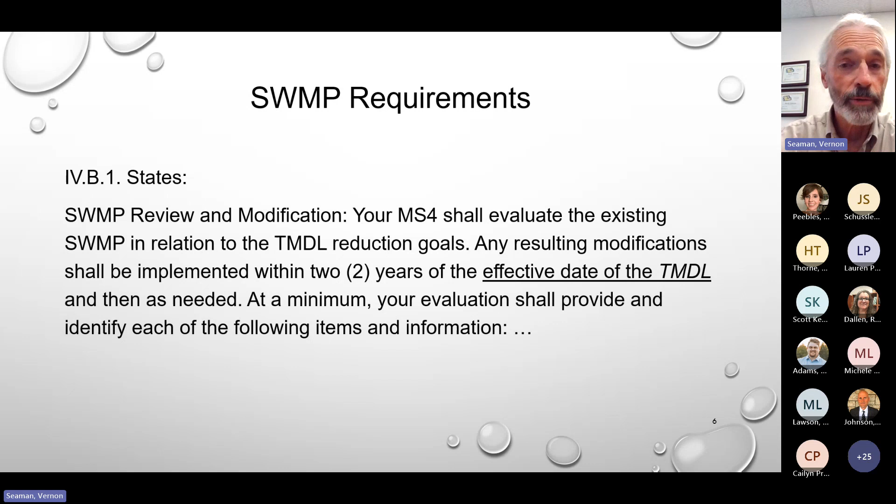So that's one passage. Now, if you go on to section 5A1, it states renewal permittees must review your SWMP and, if necessary, revise and update existing and/or develop new BMPs and measurable goals in your SWMP to meet the requirements of this permit or as required by the director to ensure compliance with the CWA or Clean Water Act. Modifications and updates shall be reflected in your SWMP and implemented within 2 years of the effective date of this permit and then as needed.

So we've got 2 more things in here. The director, DEQ, can basically change requirements and conditions if they see the need. Okay, so when do you have to update your SWMP? Well, it can be 2 years from the TMDL effective date, which would make it 2024, or the last section in this particular clause, 2 years from the effective date of this permit. So the permit came out in 2021, so that would mean your SWMP would need to be updated to include TMDL requirements by June 1 of 2023, this past June.

So some of you have already completed your SWMP updates to include TMDL, so you're finished. That's good. Some of you are still working on it, may not have completed that. If you look at the other passages, it goes on to say 2 years from the effective date of the TMDL. That gives you to 2024 for that. Regardless, if you've already completed it, wonderful, you're finished. If you haven't completed and updated your SWMP, you do need to be working on that because everybody is in agreement that everybody's SWMP should be completed no later than June 1, 2024.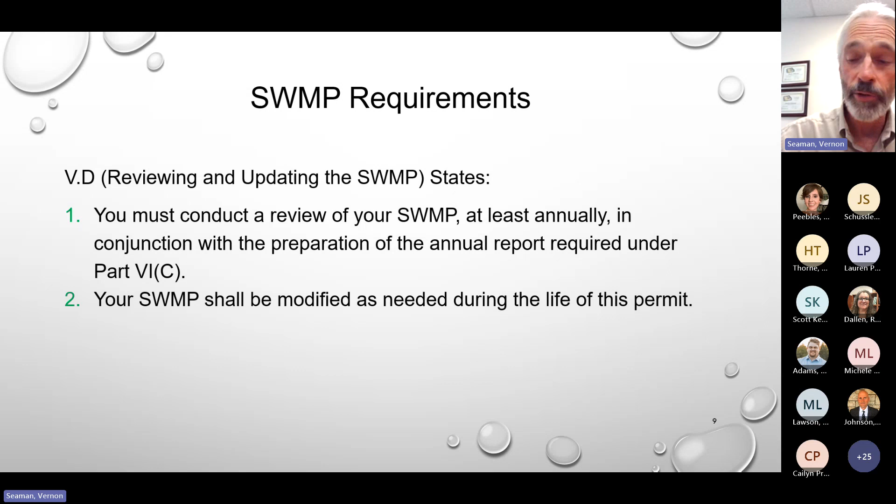So at this point, very few, if any of you, have started collecting samples. Because again, before you collect samples, and we'll talk more about this as we get farther into the program here, you do have to have an approved QAPP and you do have to have a monitoring plan before you start collecting samples. So at this point, you probably haven't started collecting any samples. However, there are a number of things that you can be doing.

You can be looking at maps, aerial reconnaissance of your area, identifying which TMDL water bodies are within your jurisdiction, which tributaries feed into those TMDL waters, where likely sampling sites could be located within your jurisdiction, what parameters are listed in your TMDL, what are you going to be testing for? For most of you, it's going to be bacteria. Many of you have turbidity. There's a few other parameters. We'll look at those later on too.

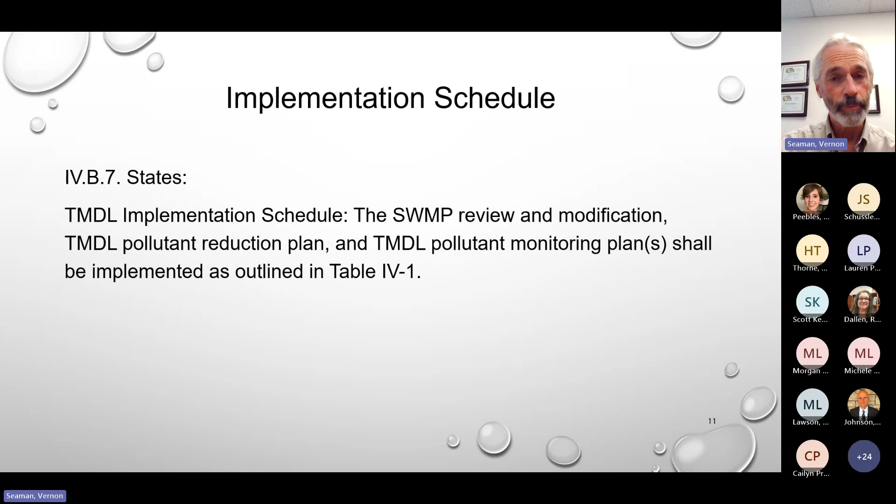All right, so our implementation schedule. So 4B7 states TMDL implementation schedule: the SWMP review and modification, TMDL pollutant reduction plan, and TMDL pollutant monitoring plans shall be implemented as outlined in Table 4-1. Let's take a look at that table. There's been some confusion over what does this table mean and what are my options? What is the best route for me to take? Because you do have a choice here.

And we'll see later the effective date is June 1, 2022. But remember, there's a passage later on that says your TMDL, your SWMP update must be no more than 2 years from approval or activation of the permit itself, which would be this past June. Okay, whether you take option A or option B, it's the same. So SWMP review and evaluation is the same whether you take option A or option B.

Now, why would you do that? The only reason I can think of for anybody wanting to skip the baseline monitoring is if you can say, I know where my sources are, because the baseline monitoring plan is basically a source tracking plan or program. You're looking for potential sources and you're determining concentration levels for these parameters. If you can already say that I know all the sources, I know where it's coming from, and I have already established a baseline, I know what my current concentrations are in that TMDL body of water, I don't need to gather more data, I'm ready to move forward. Okay, option A may be the choice you'll want to take.

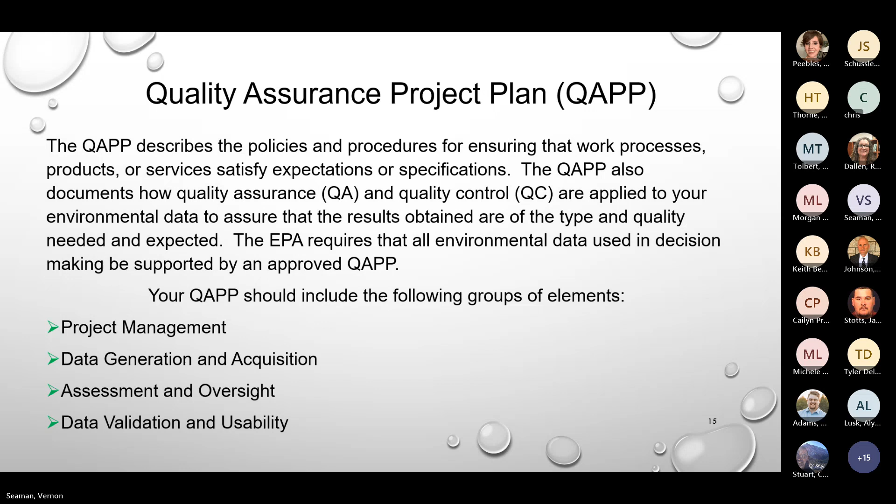It goes on to talk about what needs to be in your pollutant reduction plan. That's the phase you're going to go into 5 years after you implement your baseline monitoring plan. So keep that in mind, because you're generating the data during baseline monitoring that you'll need to conduct pollutant reduction.

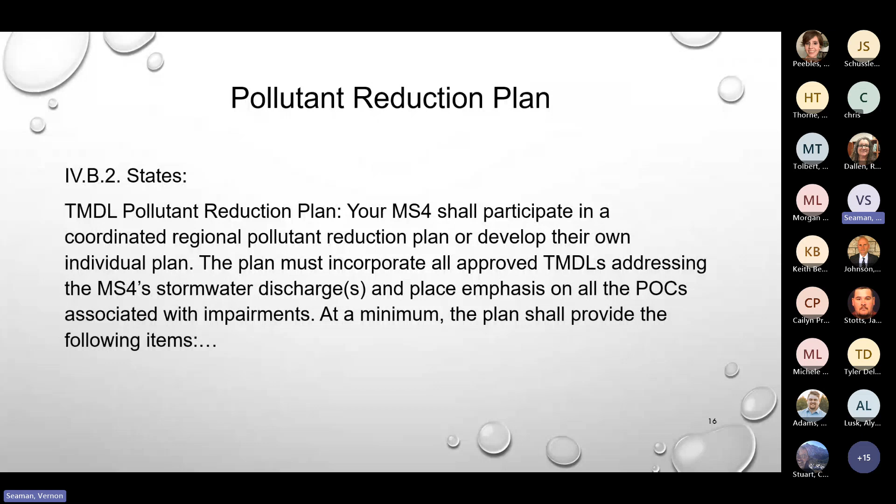That's what you'll have to show in the end: that the BMPs you have in place are effective, the water quality is trending in the right direction, and you're working towards compliance. Once you implement your reduction plan with BMPs in place, if after a period of time you're unable to show that trend, then we need to go back and look at the BMPs, because either we haven't addressed the sources we need to address, or the BMPs haven't been effective. So you'll have to take a look at the program again, probably adding or moving BMPs until you figure out a plan that addresses the sources and issues.

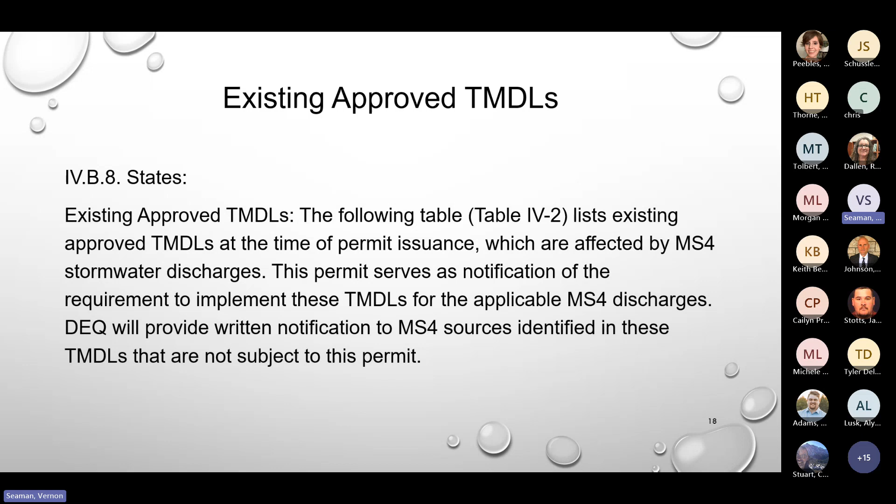So they're going to get a copy of that TMDL. They're going to start reviewing and reading it, understanding what's in there, and getting prepared to comply with the requirements. They're also going to update their SWMP to include those TMDL requirements, and they're going to make notations in their annual report regarding the progress they've made along the way.

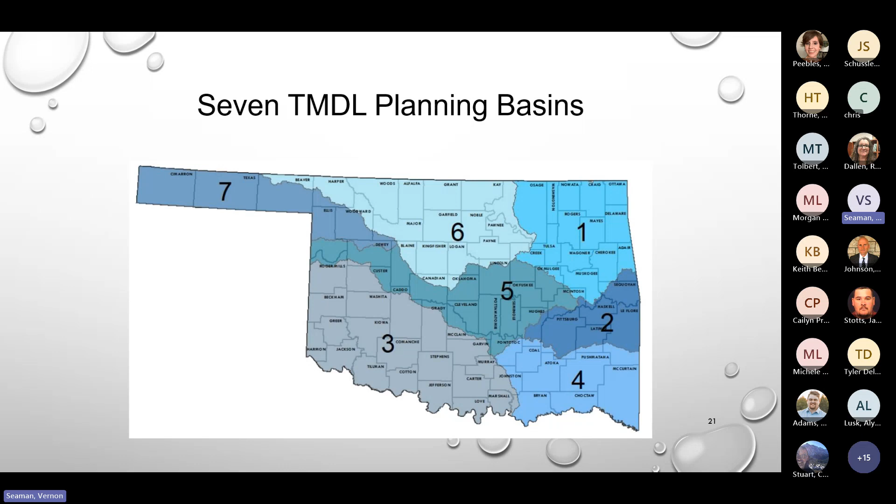The 2022 integrated report, Appendix E, is where you're going to find a listing of the TMDLs that have been approved, and get copies of the ones you need. There are 7 TMDL planning basins in Oklahoma, and this map shows which planning basin your jurisdiction is in, so you can look at that basin to determine which TMDLs have been prepared.

So if we take a quick look - obviously we're not going to go through a full TMDL, they can be hundreds of pages long - but this is the bacteria and turbidity total maximum daily loads for the Arkansas River, Verdigris River study area, Oklahoma. And then 120400, 120410, and so on - those are water body IDs included in that TMDL. That's just the cover page.

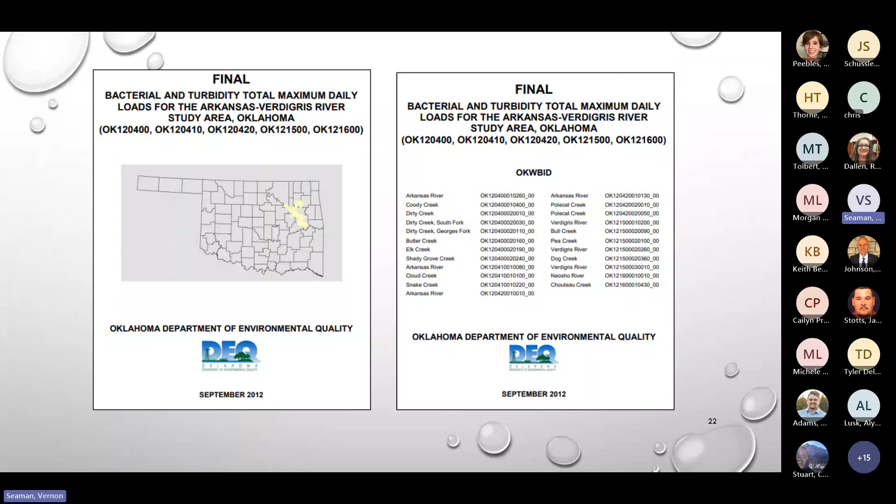And if you look back, there's another page in there showing all the different Oklahoma water body IDs covered in that TMDL. So once you find the TMDL, check that table and see which creeks are listed and which ones flow through or you discharge to. That'll help narrow down which TMDLs you're going to be working with.

Going through quickly, the planning basins: Basin 1 has 11 TMDLs. That's the Middle Arkansas Verdigris Neosho River Basin. This shows which rivers, what they're impaired for, and when the TMDL was prepared. What you're going to notice is you'll see bacteria over and over again, and turbidity over and over again.

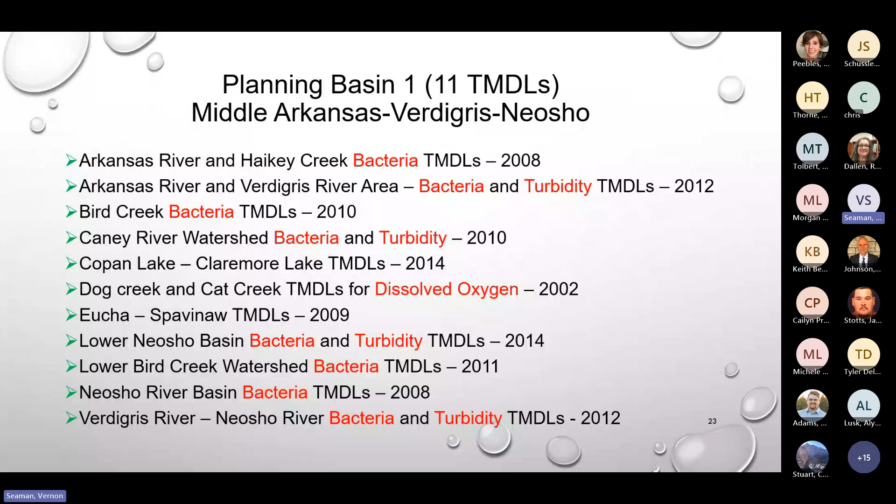Things like dissolved oxygen and chlorophyll A and a few other things will pop up once in a while. Planning Basin 2, the Lower Arkansas, only has 2 TMDLs. Planning Basin 3 has 13 TMDLs, that's the Washita and Upper Red. Planning Basin 4 has 5 TMDLs, that's the Lower Red, and those are the TMDLs that have been approved. DEQ is continually working on adding more.

Their position at this point is, even though new TMDLs are going to be approved during this permit cycle, you're not obligated to start work on those TMDLs during this permit period. There's a really good chance those TMDLs will be written into the next OKR04 permit when it gets updated. So it's not a bad idea to keep an eye on which TMDLs are in the works and when they're going to be completed, because there's a decent chance you could have additional TMDL requirements for additional bodies of water or rivers pop up in your next permit. But at this point, they're not planning to implement requirements for any TMDLs approved during this permit cycle.

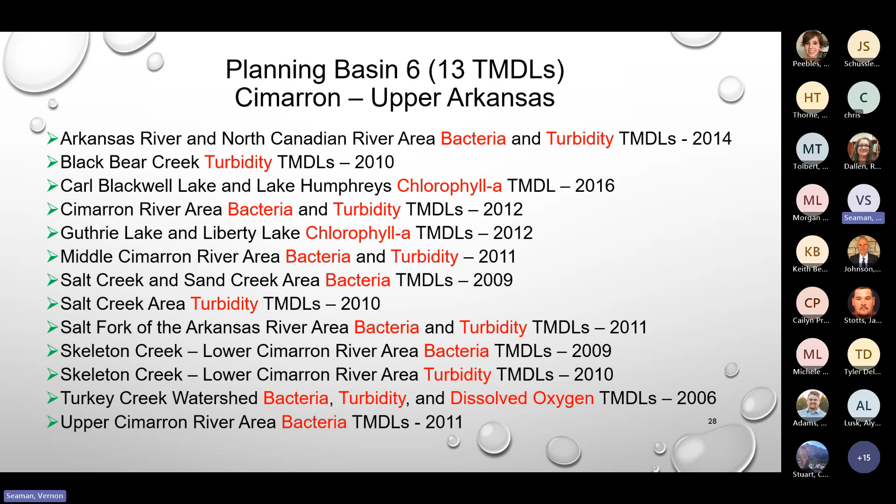Basin 5 is the North Canadian Deep Fork, and there are 8 TMDLs in that one. Basin 6 has 13, that's the Cimarron and Upper Arkansas River. Again, lots of bacteria, an occasional dissolved oxygen, quite a few turbidities, a couple of chlorophyll A's, pretty standard. Planning Basin 7, the last of the basins, has 4 TMDLs, and that's Beaver and Upper Cimarron. Notice there's actually a minerals TMDL in this one.

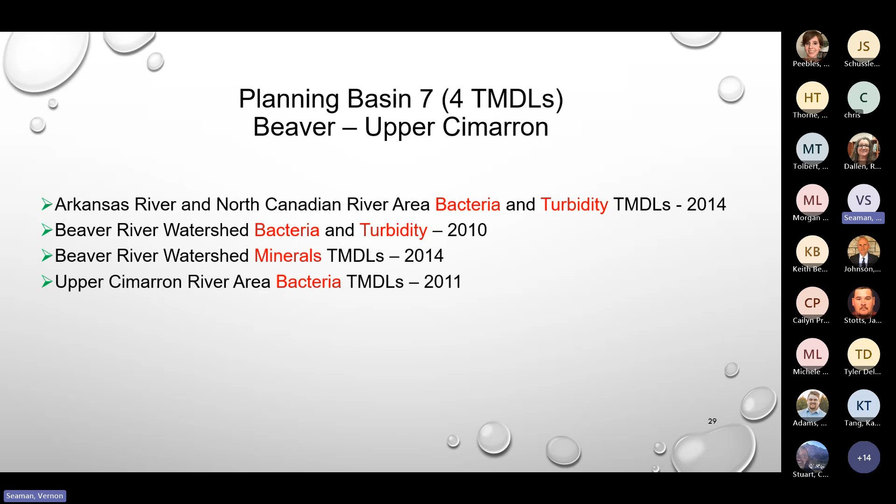You've got wonderful resources through COSWA. If you have questions, there are a number of people that can answer questions and help you out, so it's a really good organization with some really good resources within COSWA. If you want to give me a call or send me an email, I'll be happy to help you out. I work from home about half the time, so don't worry about calling my cell phone. If I don't pick up my office phone, there's a good chance I'm at home, and there's a decent chance I'm out fishing or doing something else, so I'll return your call when I get back. I'll be happy to help with anything I can assist with. Of course, you can always call DEQ too, and they'll give you a hand.

Many of you will have questions, since this is new for just about everybody. You haven't had to deal with TMDL requirements before, so as the program rolls out, you're bound to have questions. Feel free to reach out. The COSWA folks will help you, I'll give you a hand if necessary, and of course DEQ will always be there to help you as well.